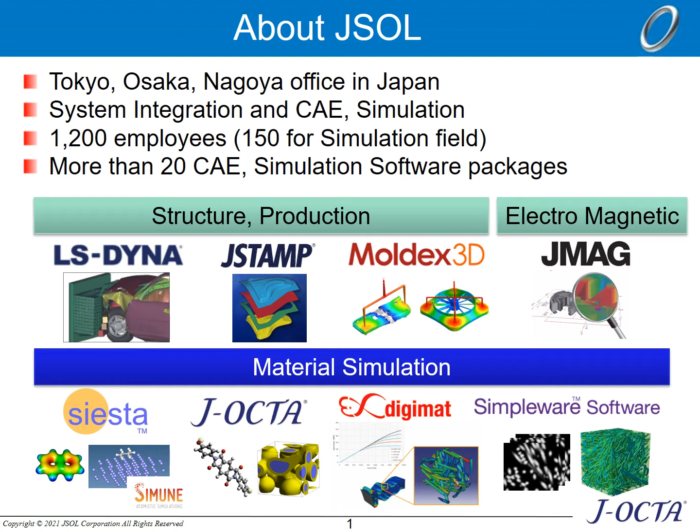Here is the historical background of our software. J-OCTA is our software, but it's based on the free version of Octa, which was developed as a Japanese national project around 2000. Many manufacturing companies participated in it. Several simulation engines, a simple modeling GUI and a Python scripting interface were developed. It is still being upgraded and distributed by i-Rheo, a Japanese research institute.

We can count the number of users on our BBS and it is over 3,000. Springer has published a book about it. Please refer to it if you are interested. One of our recent topics is the integration with Materials Informatics. Octa has been adopted as the platform for a national project on Materials Informatics in Japan. This has resulted in additional capabilities related to machine learning and deep learning.

J-OCTA is being developed by JSOL as a commercial version of Octa. Basically, J-OCTA includes modeling tools for using each engine in Octa. One parallelized engine is also included. The user base is mainly industry, and more than 100 companies have installed this software.

The latest version of Octa, which is freeware, is still under development. The latest version is 8.3, but 8.4 will be released soon. The latest version of J-OCTA is compatible with 8.3, but we will support it as soon as there is an upgrade of Octa. In addition, an enhanced Octa is also being developed to handle images, support large-scale systems, and add machine learning capabilities. You can download it from Octa BBS. The graph below shows the number of registered users of Octa BBS, and it has been expanding to more than 3,000 users in 2020.

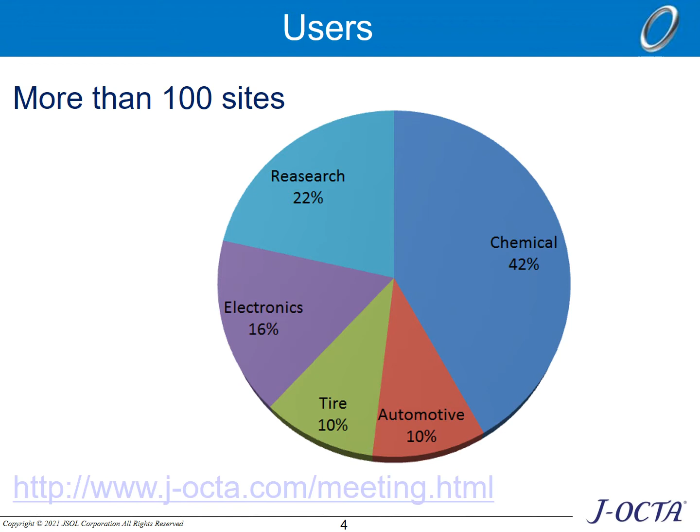Next, the physical properties of fiber-reinforced plastics and thermoplastic elastomers used to reduce weight. Fiber-reinforced plastics are used as an alternative to metal materials. Thermoplastic elastomers are lightweight because they do not contain fillers. Mechanical and fracture properties, such as stiffness, are design factors in these materials.

Next, let's look at low rolling resistance tires. This covers rubber composites, and these include carbon black and silica. Physical properties, such as viscoelasticity, are important for rolling resistance, which affects grip performance and fuel efficiency.

Finally, I would like to talk about electronic materials, which are important for 5G communication and other applications. Low dielectric constant, thermal resistance, and moisture resistance are important here. As you can see, the optimization of basic material properties is important in all cases. In this seminar, we will introduce an example of how these fundamental properties were evaluated by molecular simulation.

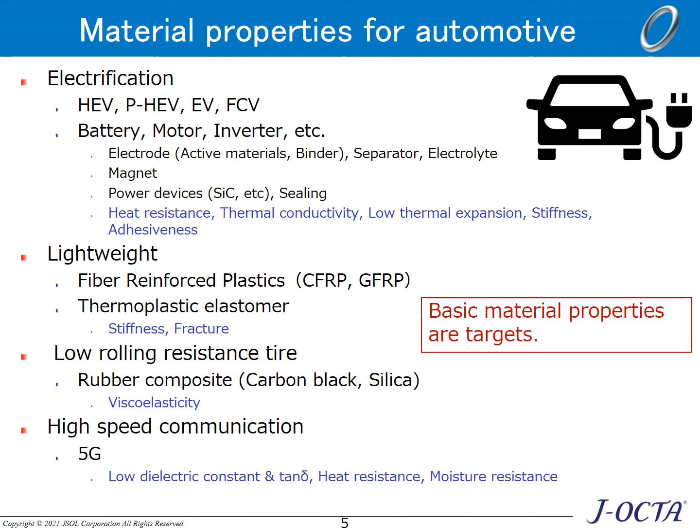J-OCTA has some simulation engines from nanometer to micrometer scale. They have unique names. Siesta is the density functional theory engine based on quantum mechanics. Electron state, interaction, polarization, and reaction are evaluated. In this field, ABINIT-MP is used to estimate interaction parameters based on the fragment molecular orbital method. And J-OCTA has interfaces with Firefly, Gaussian, and MOPAC as external engines.

About the molecular dynamics, COGNAC and VSOP are default engines in J-OCTA. Molecular structure and many properties like thermomechanics and diffusion can be evaluated. And external engines such as LAMMPS, GROMACS and HOOMD can be used as well. PASTA and NAPLES are based on the tube model of polymer entanglement systems. Viscoelastic properties can be calculated, especially for polymer melts and solutions.

SUSHI is the mean field engine to calculate the phase-separated structure. Polymer blends including block copolymers are simulation targets. MUFFIN is based on continuum mechanics, especially for the elastic finite element analysis of phase-separated structures obtained by SUSHI. And we have a direct interface with LS-DYNA to conduct nonlinear structural analysis as an external engine. KAPSEL is for colloidal dispersion systems based on fluid dynamics.

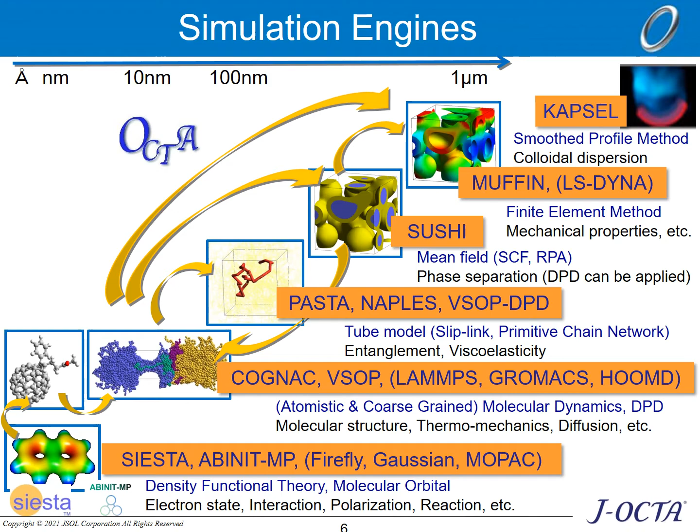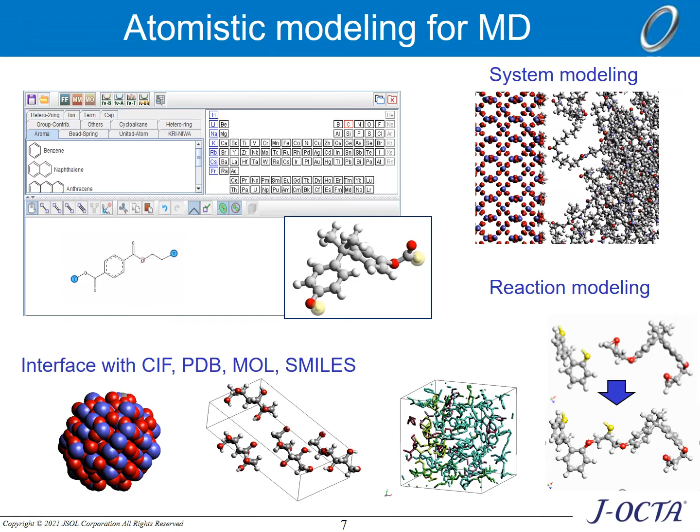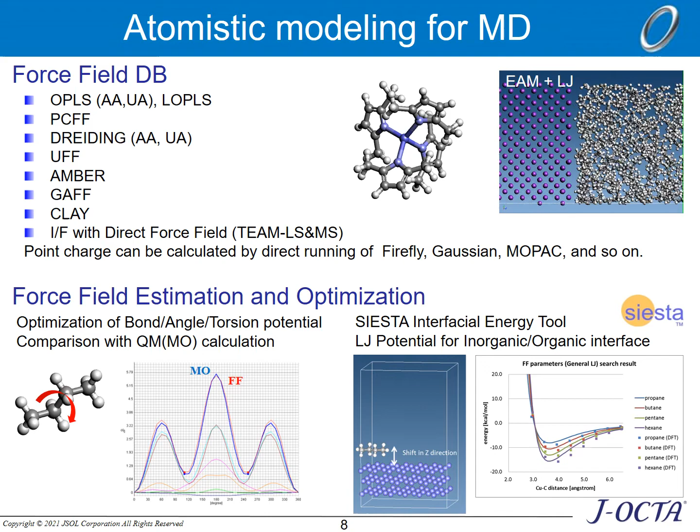J-OCTA has Siesta Modeler, to set up and run Siesta on the GUI. DFT is an abbreviation for Density Functional Theory. The Siesta Modeler is a different version of Atomistic Pro, developed by Simune, a Spanish company. With the Siesta Modeler, you can perform single-point DFT calculations, structural optimization, band structure, nudged elastic band, equation of state, vibration, and phonon analyses. In future versions, the ability to perform first principles molecular dynamics will be added.

DFT can be used to analyze the electronic state and spin of materials. The NEB function can also be used to analyze the activation energy in chemical reactions. The EOS function can be used to calculate the bulk modulus of a solid, and phonon analysis can provide information on the lattice-specific heat. First principles molecular dynamics can also be used to analyze thermal expansion and reactions.

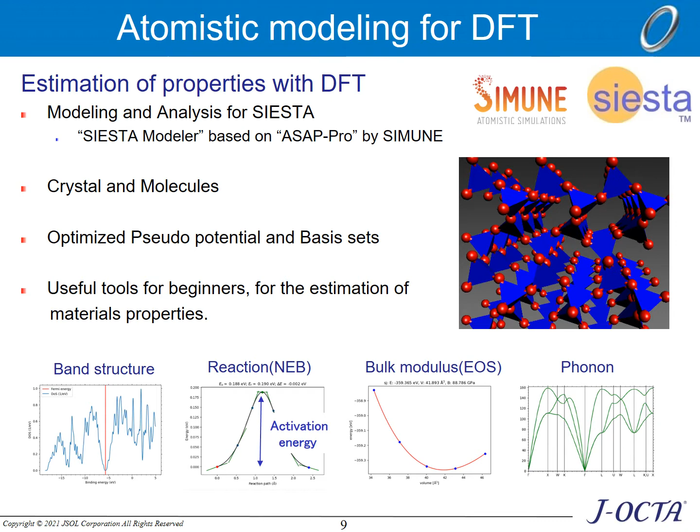For the non-bond potential, the potential between coarse-grained units can be determined by using the iterative Boltzmann inversion method, or a Monte Carlo-based method. After coarse-grained molecular dynamics has been performed, it can then be mapped to an all-atom model. We call this reverse mapping or back mapping.

To predict the phase-separated structure, either the mean field method or dissipative particle dynamics can be used. The modeling procedure is the same as for coarse-grained molecular dynamics. Draw the chemical structure on J-OCTA and set the coarse-grained unit.

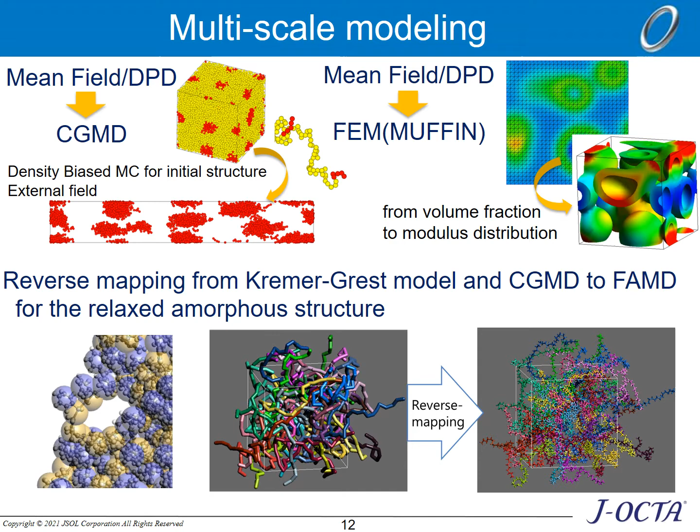In the figure below, the initial structure of the all-atom model is obtained based on the results of coarse-grained MD. The time domain that can be calculated for all-atom MD is limited. On the other hand, it is possible to obtain the structure of a molecular chain that has been sufficiently relaxed by coarse-grained MD. By reverse mapping from the coarse-grained model to the all-atom model, we can obtain the amorphous structure required for all-atom MD.

J-OCTA includes modeling tools for the finite element method at the microscale. J-OCTA originally contains a finite element method engine called Muffin, but it also has interfaces with LS-DYNA and DIGIMAT as external engines. The upper figure shows the phase-separated structure obtained by the mean field method, converted to a voxel mesh. LS-DYNA input is created and nonlinear structural analysis is performed.

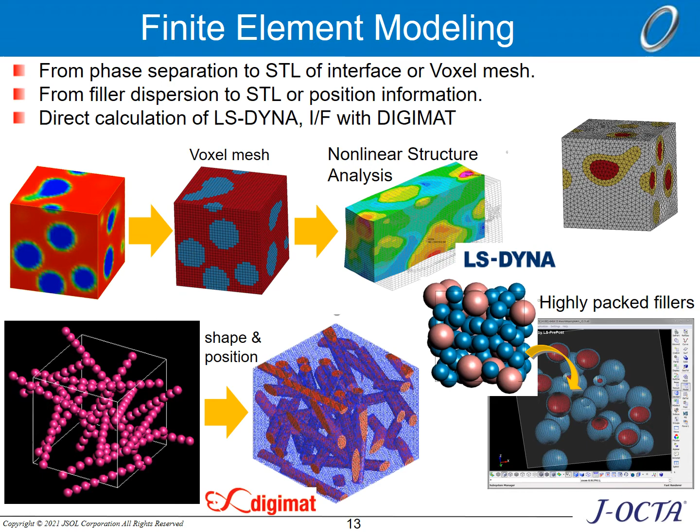In addition, the system can perform deep learning of the relationship between physical properties and molecular structure. This makes it possible to estimate the properties of unknown materials. This technology is commonly referred to as QSPR. Recently, a technology to calculate the structure of a material in order to obtain a target property is also available, and J-OCTA plans to provide such a function.

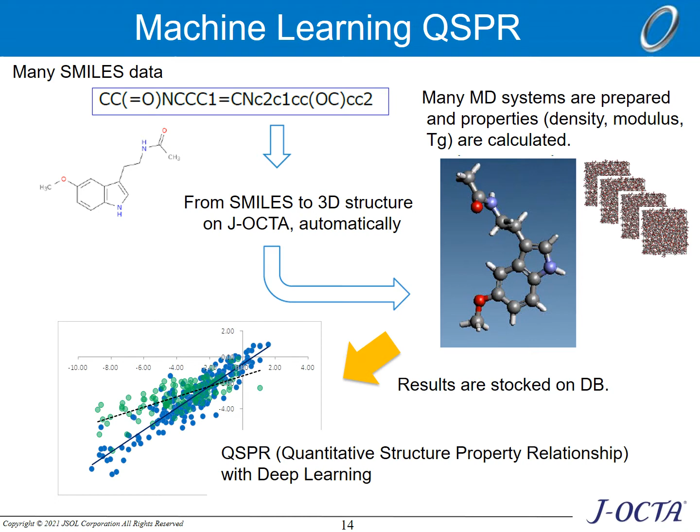In addition, J-OCTA has a curve fitting function with generalized Maxwell model. With this function, we can fit generalized Maxwell model, Prony series, to the data of relaxation modulus G(t), which is obtained by simulation engines. The data are fitted by nonlinear least squares. According to the coefficients of Prony series, complex dynamic moduli are evaluated simultaneously.

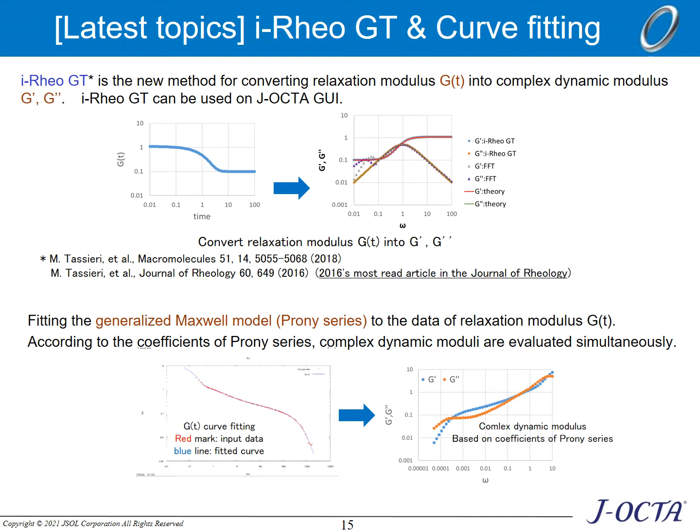From here, we would like to introduce some examples of material properties evaluated using J-OCTA. We will gradually move from a small scale to a large scale. Here, density functional theory is used to evaluate the adsorption energy of organic molecules on inorganic crystals. In order to correctly evaluate intermolecular forces such as van der Waals forces, it is necessary to use a method that takes quantum mechanics into account. J-OCTA is used here. It is possible to evaluate the adhesion of materials and various interfacial properties. However, it should be noted that the scale of target is below the nanometer.

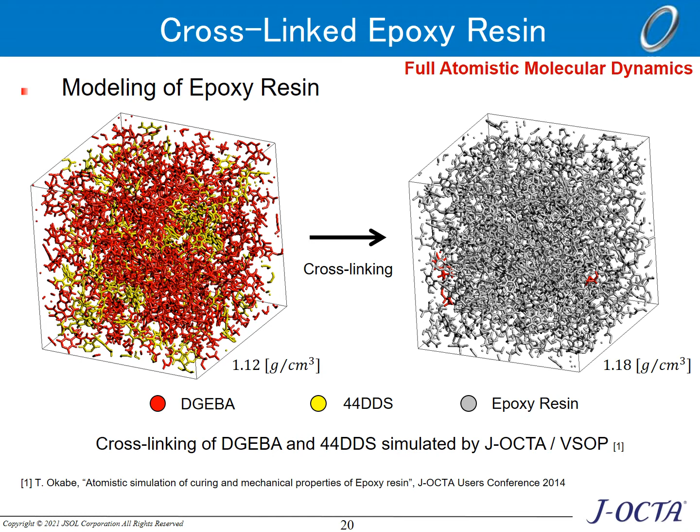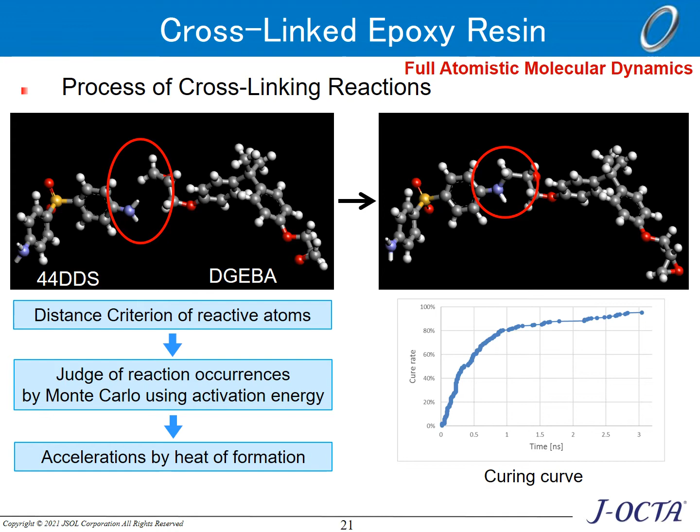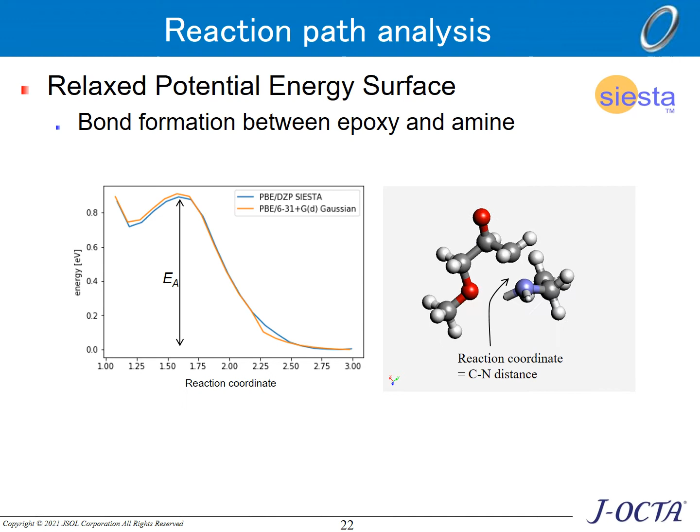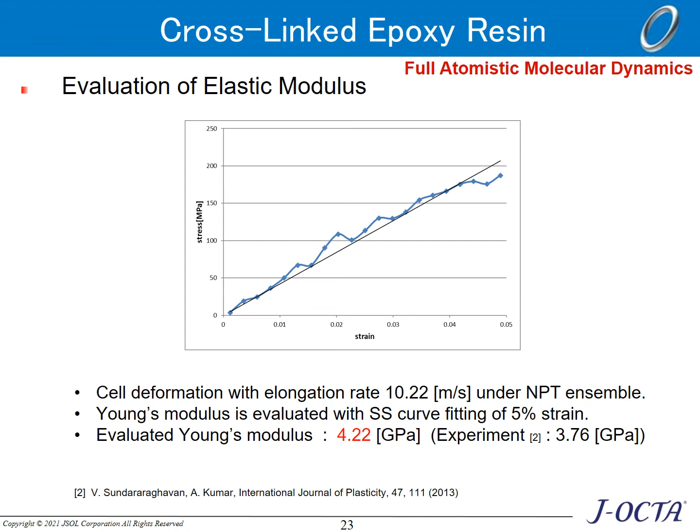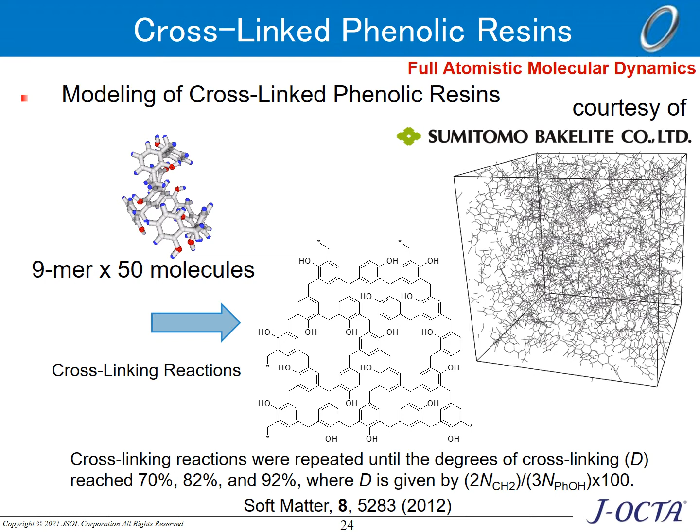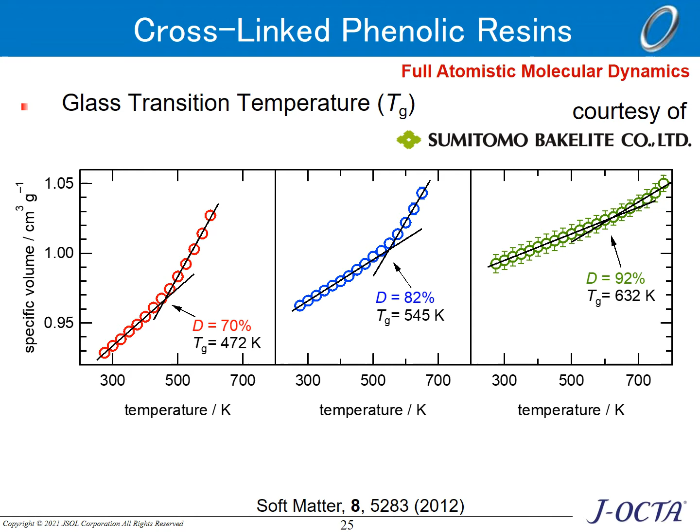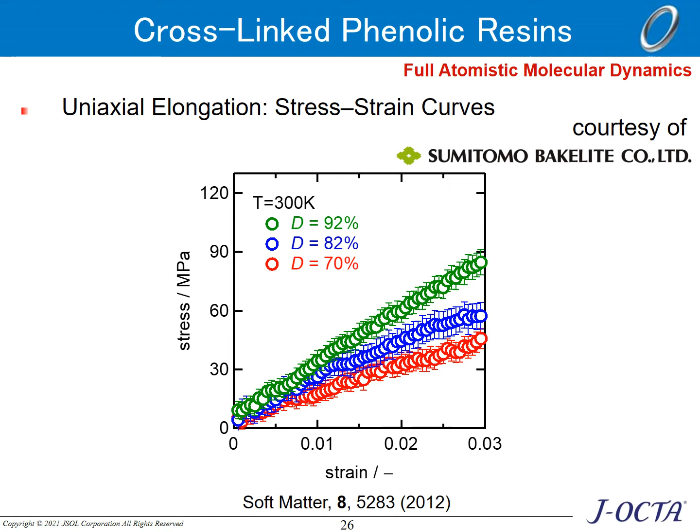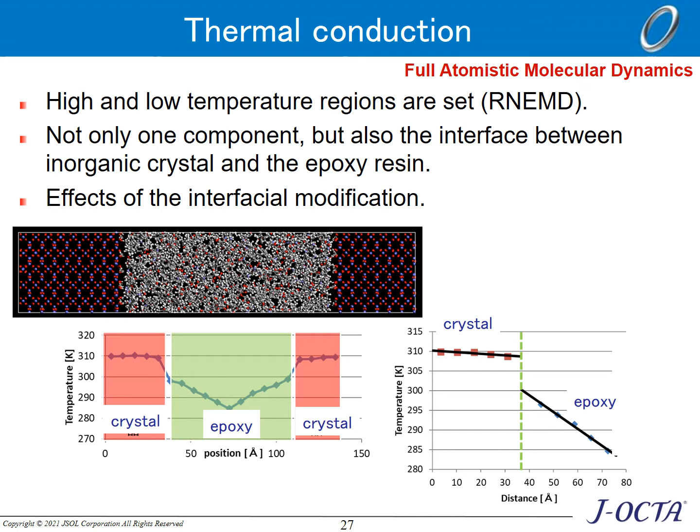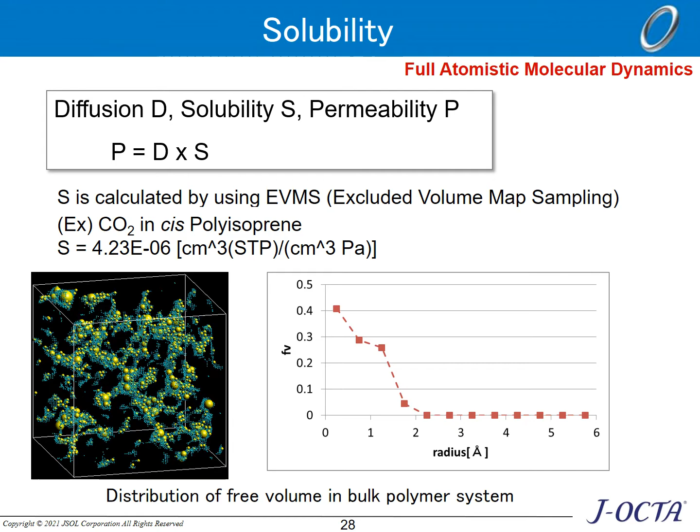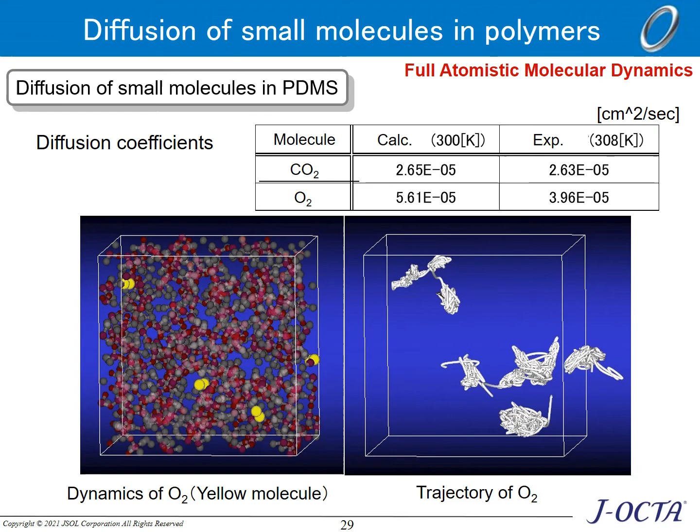The ionic conductivity can be calculated based on the self-diffusion coefficient of the lithium ion. Molecular simulations can be applied to the design of electrolyte solutions for lithium-ion batteries.

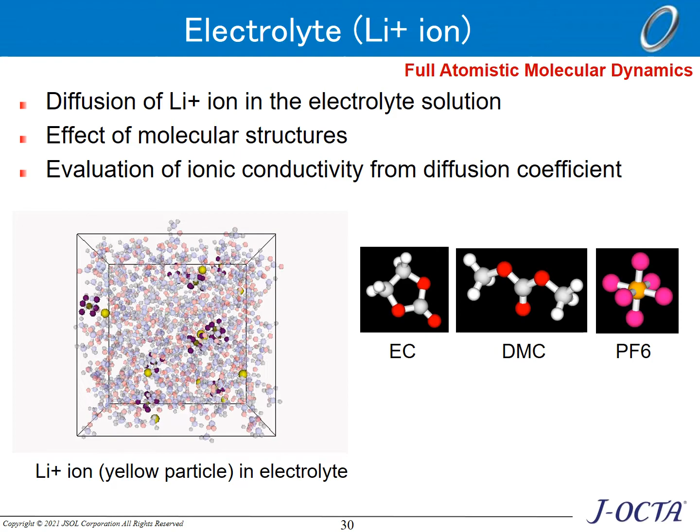Porous materials, such as zeolites and metal organic frameworks, are attracting attention for their catalytic functions and gas adsorption properties. In recent years, the reduction of greenhouse gas emissions is necessary, and they are expected to be used for capturing CO2 from the gas mixture.

Zeolite can have a structure in which Si atoms are replaced by Al, and various cations are included to satisfy charge neutrality. Here, we investigated adsorption isotherms for a NaY zeolite, which is Na ion containing FAU type zeolite.

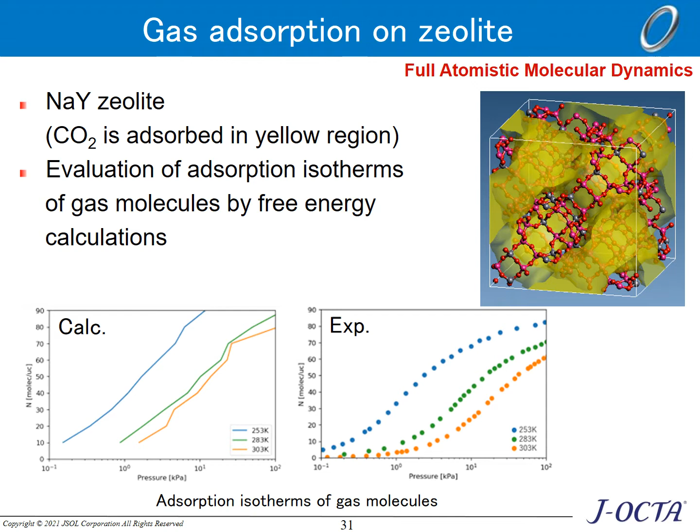In recent years, 5G communication technology is becoming popular, and the development of materials suitable for high-frequency communication is progressing. In this case study, we evaluated the dielectric properties that are important for reducing dielectric loss.

Dielectric dispersion in the high-frequency range can be calculated using full atomistic molecular dynamics. Complex permittivity was evaluated from the phase shift when an external electric field is applied to the system. We also calculated the real and imaginary parts of the complex permittivity and evaluated the dielectric loss tangent. The results are shown in water, which is easy to verify, but can also be applied to resin materials.

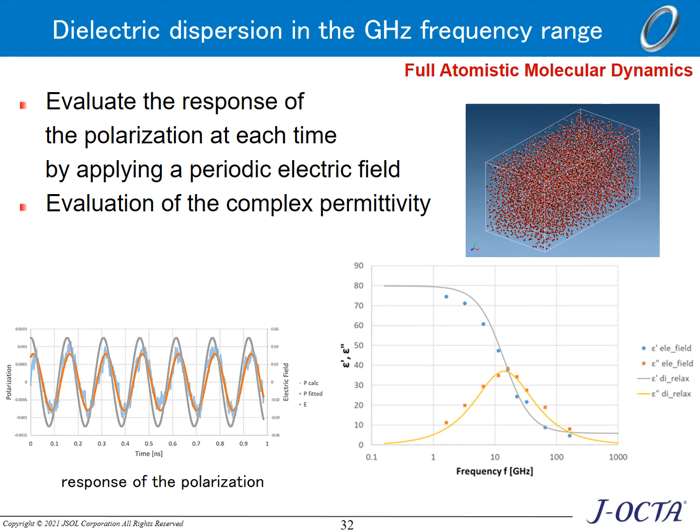In full atomistic molecular dynamics, phenomena of 100 nanoseconds or less are targeted. On the other hand, coarse-grained molecular dynamics can deal with the relaxation behavior of rubber-state polymers, which requires calculations of microseconds or longer.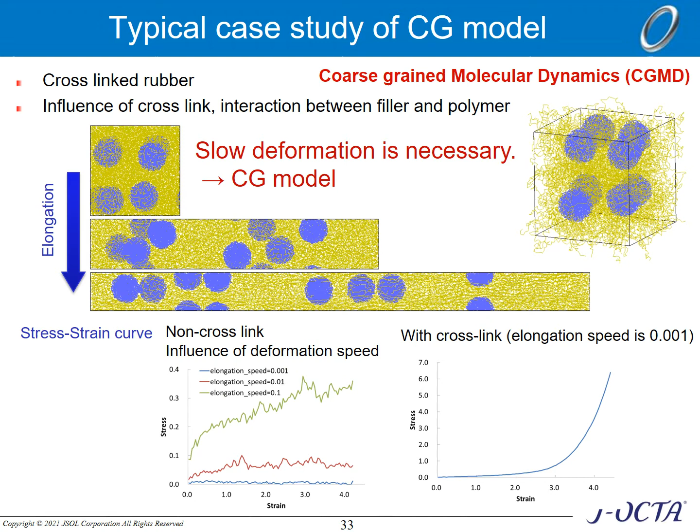Due to the large number of fillers, the system size is several hundred nanometers. For this reason, a supercomputer was used to perform the calculations. In addition, a slow deformation rate has been applied, which is slow enough to describe the rubbery state of the polymer.

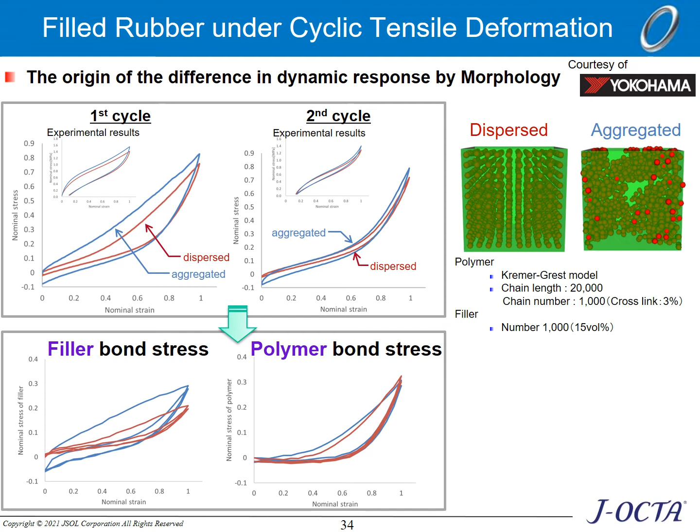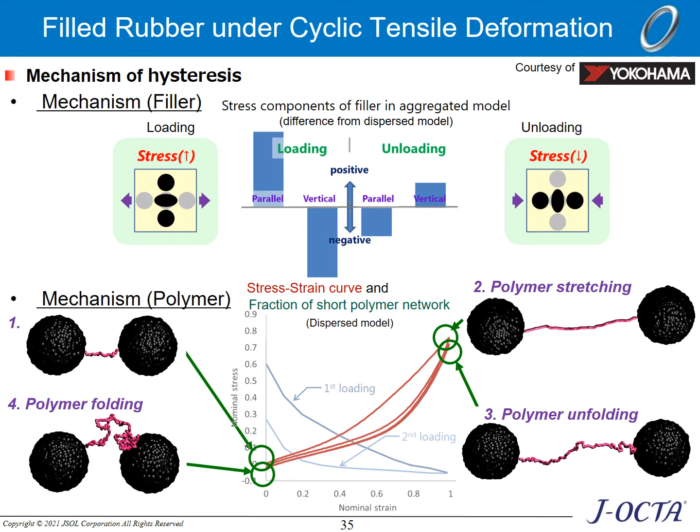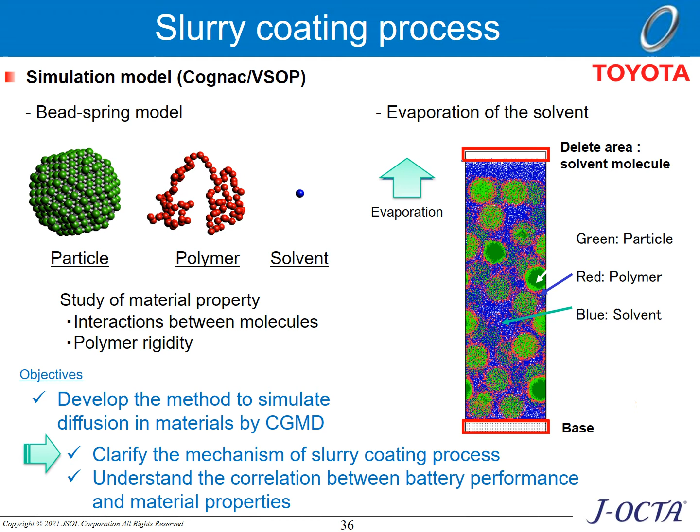VSOP was used to simulate the evaporation process, to obtain the porous structure after solvent evaporation. Many particles are treated. An evaporation process requires long time calculation. So the supercomputer was used.

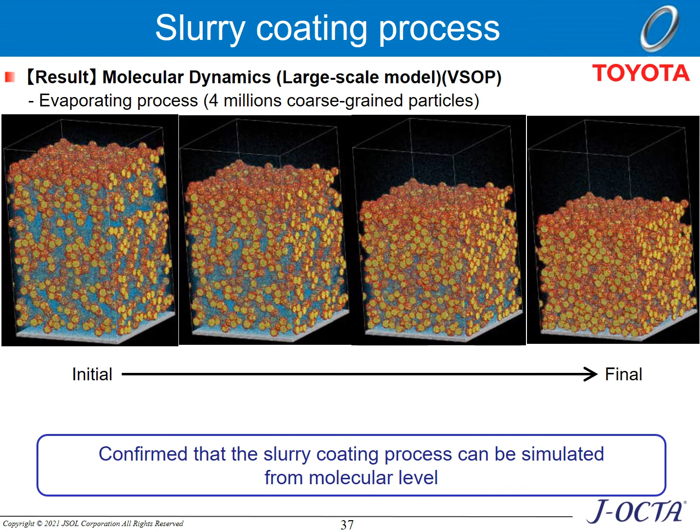From the results, the structures of particles, polymers, and pores were extracted, and their diffusion and conductivity were analyzed. These results simulate the diffusion and conduction of electrons, ions, and gases in fuel cells and lithium-ion batteries, respectively. The results indicate that it is necessary to control the adsorption performance of the polymer and optimize the porous structure to improve the battery performance. These results indicate that molecular simulation can be applied to the design of mesostructures.

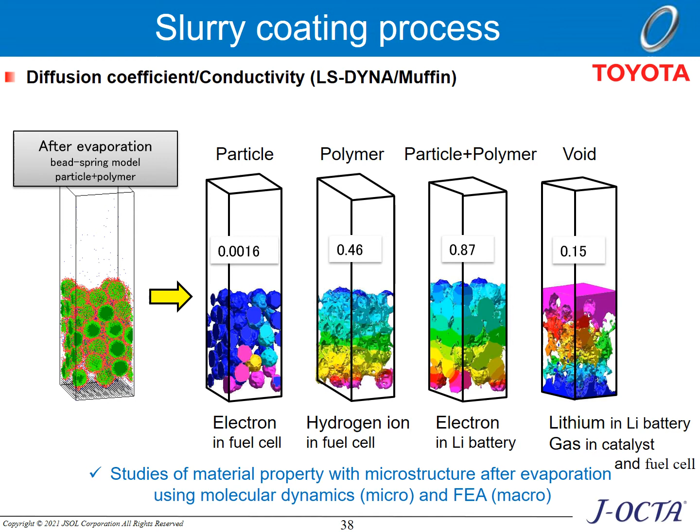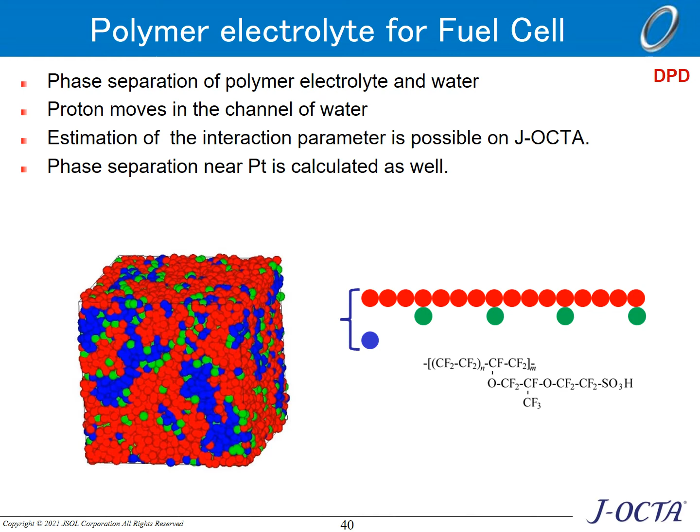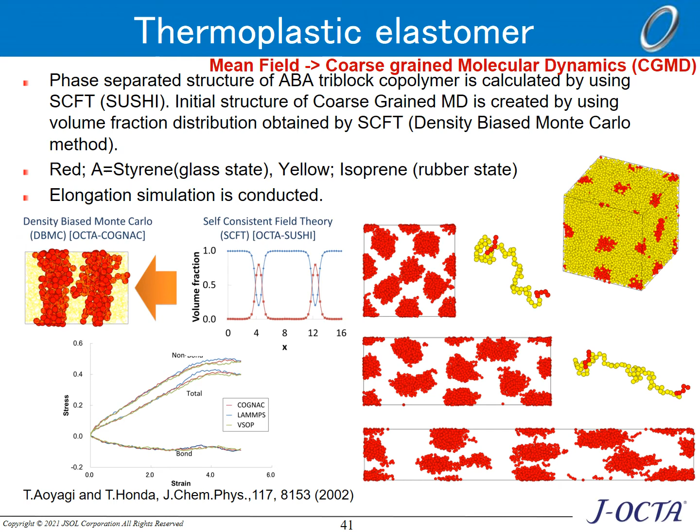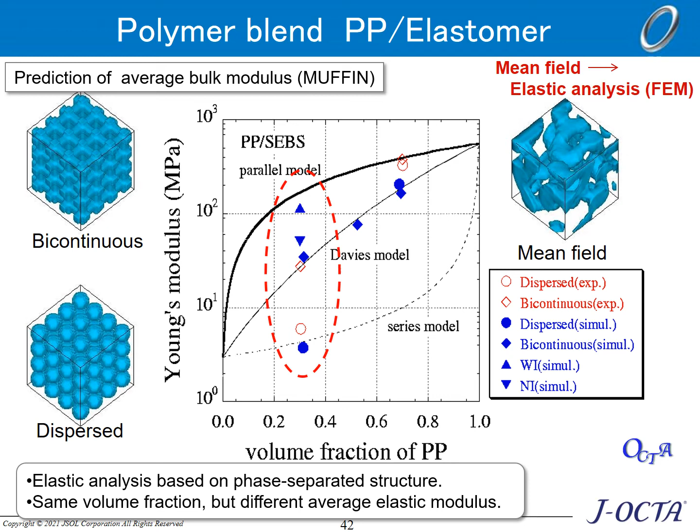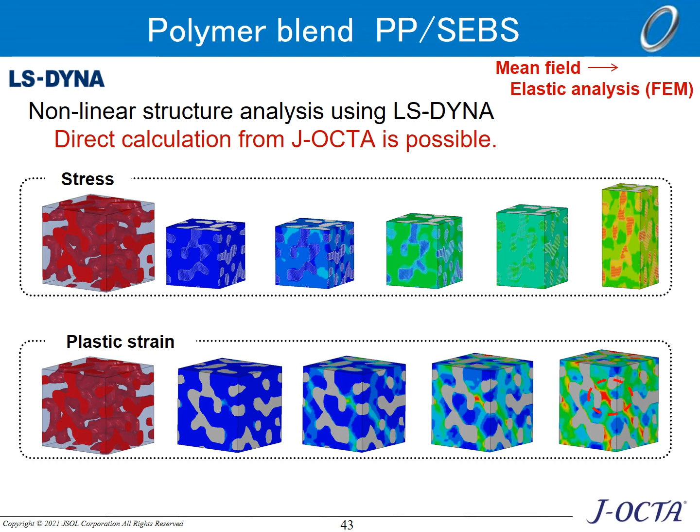This is an advanced simulation related to the previous page. The phase-separated structure was obtained by SUSHI, and we used LS-DYNA. Nonlinear, elastic, and plastic phenomena were evaluated. We can see the concentration of plastic strain at the narrow region between rubber components.

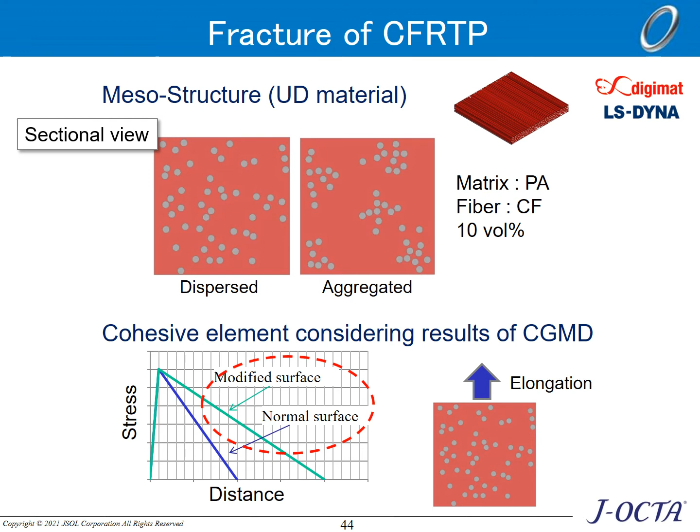Finally, the deformation is applied in the direction shown in the lower right figure. LS-DYNA is used in this calculation. We need to make sure that the material properties of the cohesive element that we set up on the previous page are reasonable. Therefore, we performed a qualitative evaluation using coarse-grained molecular dynamics.

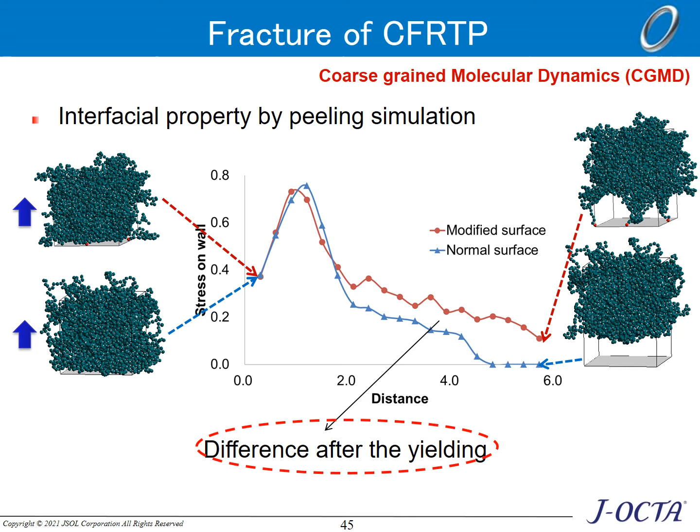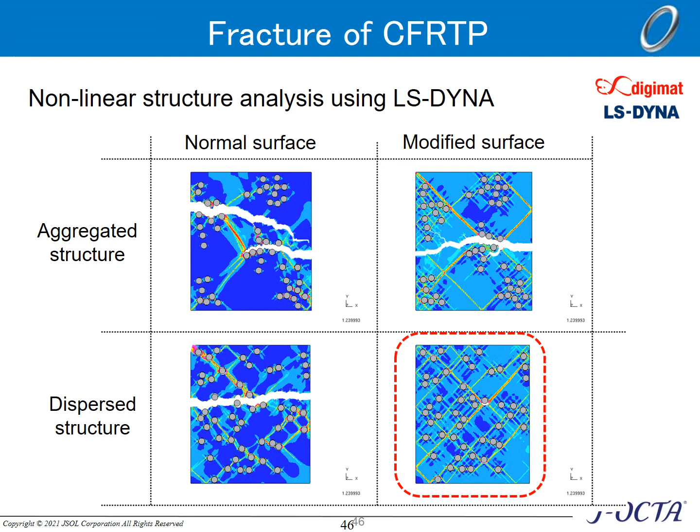The aggregation of the fibers causes stress concentration. Also, if the interface is weak, it will quickly break down. After confirming the adhesion properties of the interface with molecular simulations, multiscale simulations for the design of fiber-reinforced plastics have been performed.